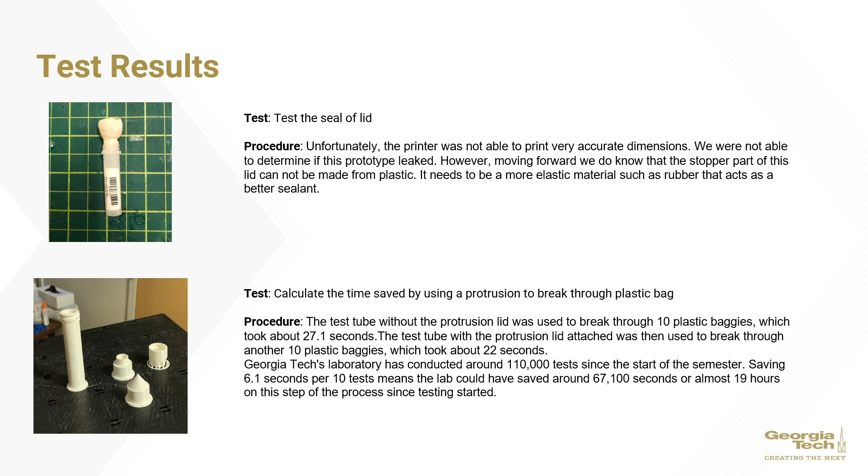The third prototype is a drill-like device that can screw and unscrew test tube lids. It was found that this prototype can save the lab 3 minutes on each rack of 48 test tubes. Our final prototype is the ring loader. By using magnets, the ring loader can lower the time to load the mechanical disruption machine from 90 seconds to 2 seconds. This reduces the time by 97%. Because of these test results, we decided to pursue the ring loader as our final design concept.

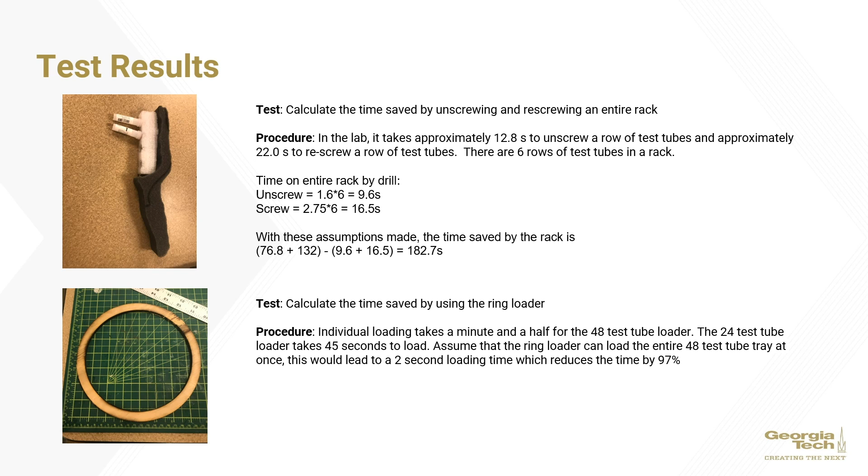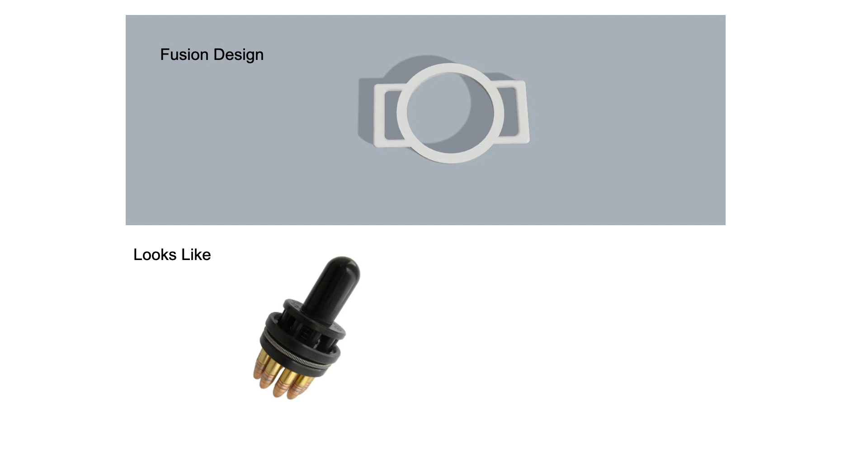This is our Fusion model of our prototype, showing a ring loader that can gather 48 test tubes in the correct orientation to be loaded into the mechanical disruption machine. Our looks-like prototype is a speed loader. This is a handle component attached to a loading component that can gather and keep multiple bullets in the correct orientation. Our works-like prototype is this crane with an electromagnet that can attract, pick up, and hold large objects, such as cars. In our case, we would be using magnets to pick up test tubes.

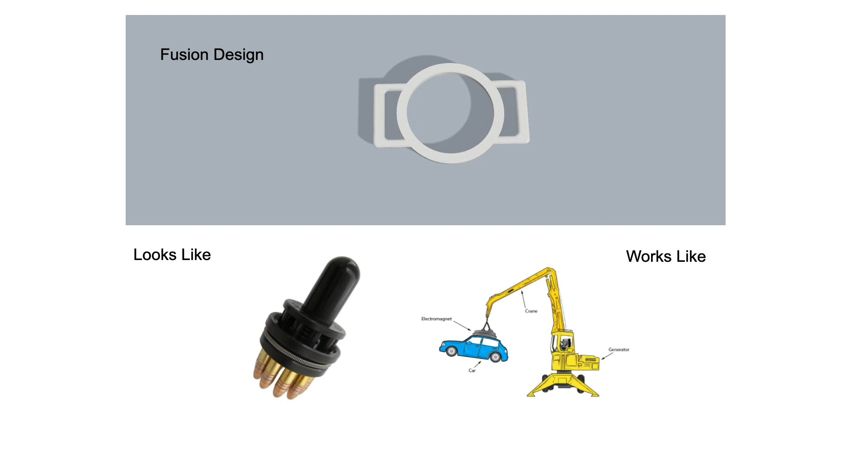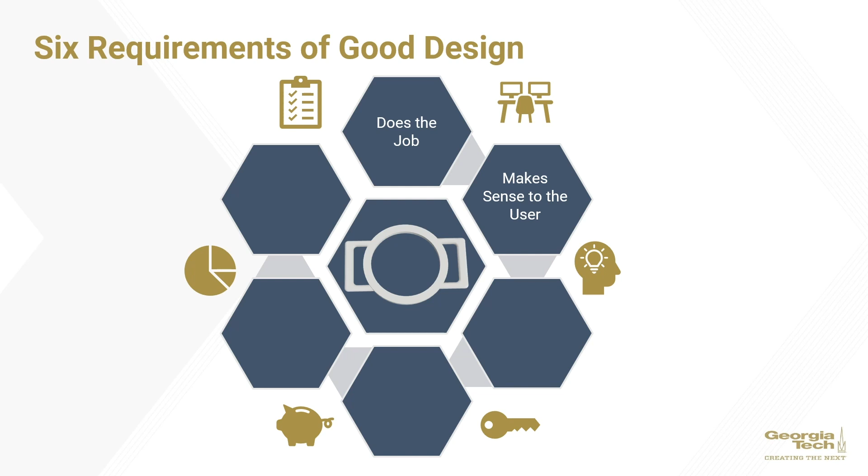6 requirements of good design. First, it does the job. It is able to reduce the amount of time needed to load the mechanical disruption machine. It does this by a factor of 48 by loading 48 test tubes at once rather than one. Next, it does make sense to the user. Due to the handle on both sides, it is intuitive for how to grip the magnet loader. Additionally, there are nests for each of the individual 48 test tubes, which makes sense to how the test tubes are connected to the ring loader.

Next, the user can access it and the user can afford it. Because it is made out of simple materials, such as cheap magnets from Amazon and plywood, it is very accessible as well as affordable. Next, there's a system of proportions. Due to the symmetry of the handles and the equally spaced magnets on the ring loader, there is a system of proportions in this design. And lastly, it has an acceptable appearance. Because it demonstrates the 5 other requirements of good design, along with the symmetry and equal spacing, there is an acceptable appearance.

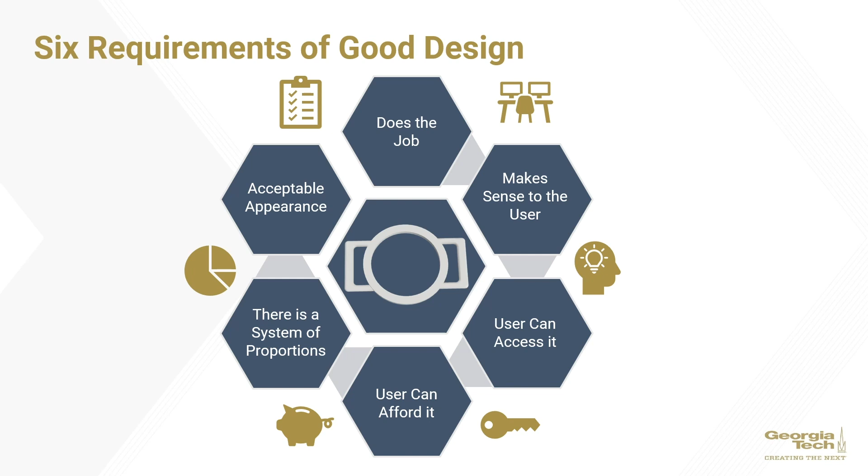When our team entered the concept development phase, we explored a breadth of possible solutions while keeping user feedback in mind. All solutions were focused on making a more efficient, cheap, and durable testing component for the asymptomatic surveillance testing lab. While ideating, we focused on bottlenecks in the process that were specifically identified by the user. These bottlenecks include punching tubes out of the bags, unscrewing and rescrewing test tubes, and loading the mechanical disruptor. These problems are a few examples of the concept problems we focused on while ideating.

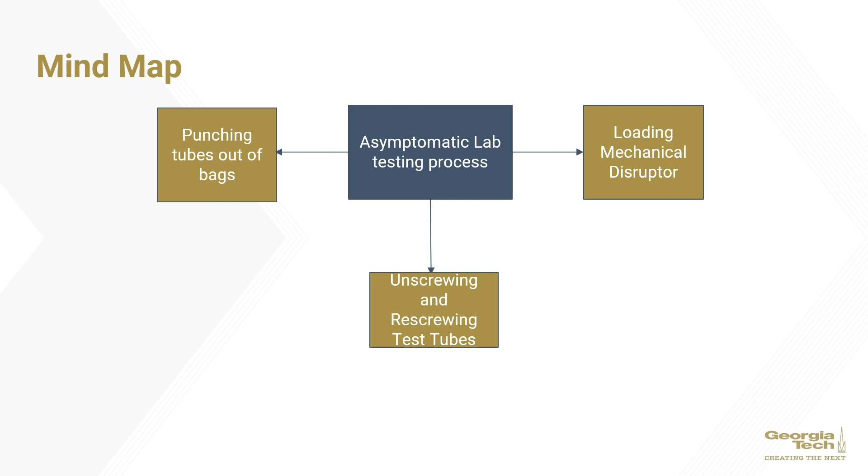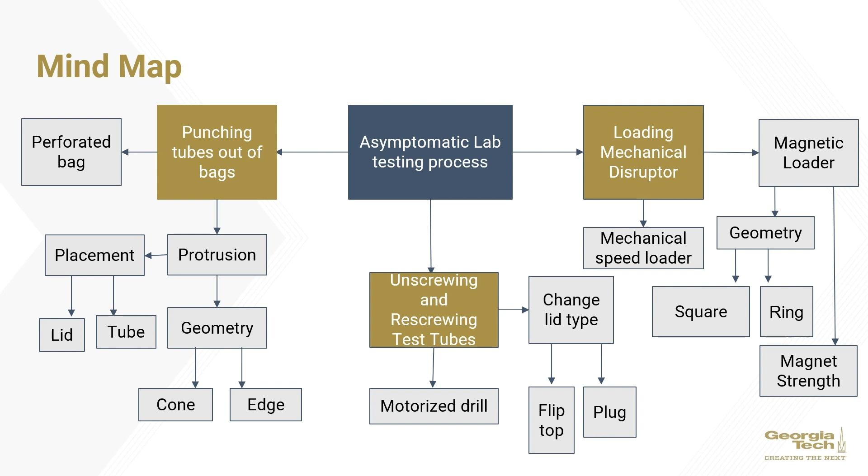From there, we were able to create concepts of many ideas to improve these processes. We looked into adding protrusions on the tubes, creating a motorized drill, and even a preliminary ring loader design. Individually, we came up with potential concepts that address each concept problem. This phase helped us brainstorm many possible design avenues. With feedback from our peers, teaching staff, and users, we were able to narrow down our concepts.

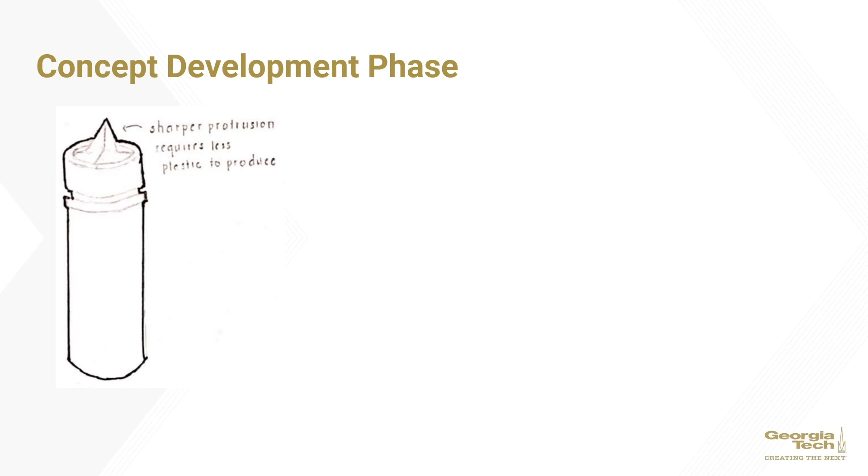Here on the screen is a concept drawing of a tube protrusion to speed up the process of punching tubes out of the bags. This is a preliminary drawing of the test tube unscrewing drill, which would speed up the process of unscrewing and rescrewing the test tubes. And lastly is a preliminary drawing of our magnetic ring loader.

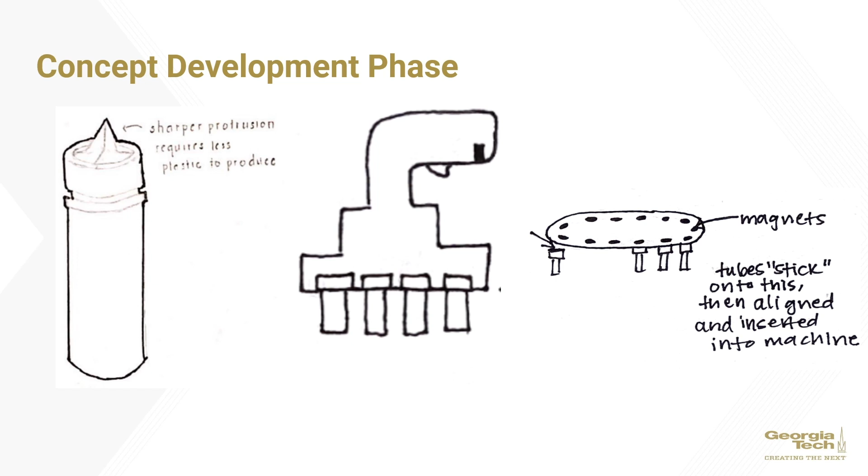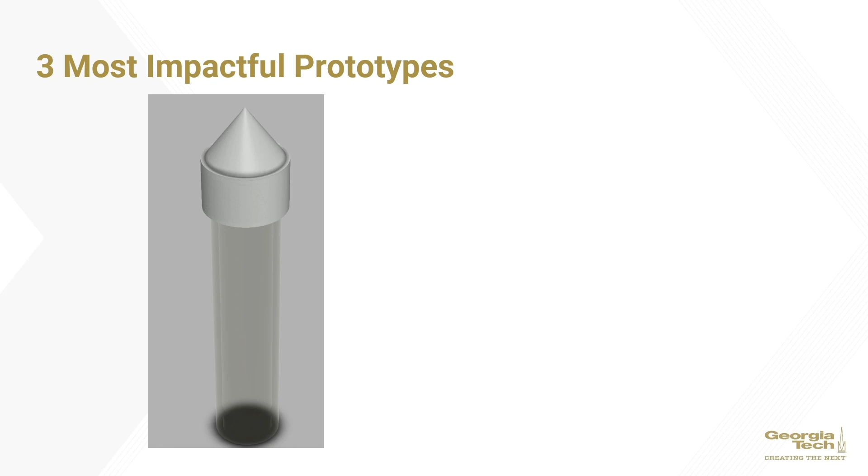After deciding which concepts to move forward with, we started to physically prototype each concept. This was useful to gauge user feedback and test whether our idea would actually solve the problem. This is a prototype of our test tube protrusion, which we 3D printed. This is a looks-like prototype of our motorized drill, and this is a preliminary prototype of our ring loader, which we laser cut. Like Sarah mentioned, each of these prototypes gave us test results which helped us create a new iteration of the prototype. Combining these results with user feedback helped lead us to our final design concept.

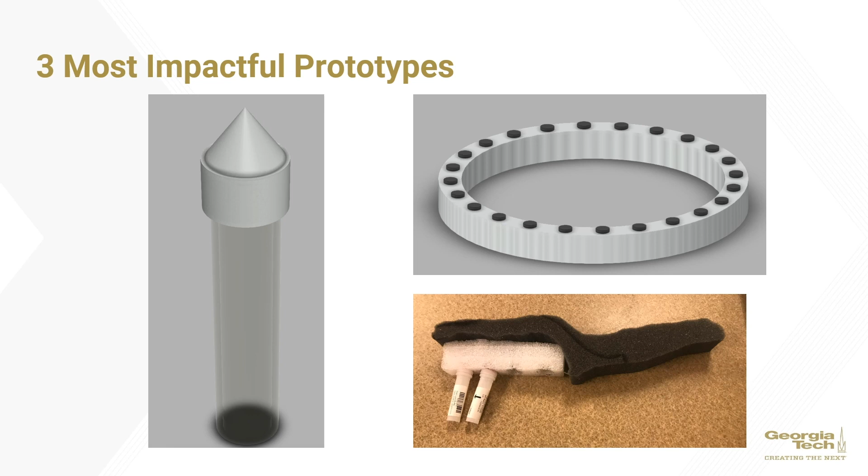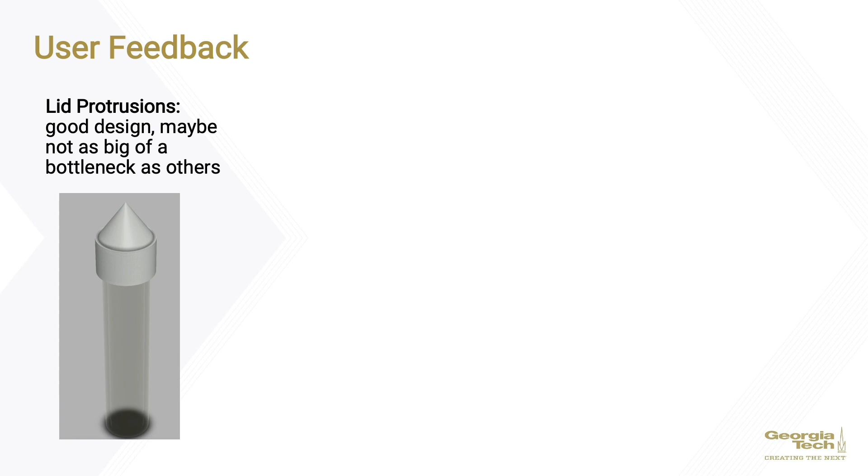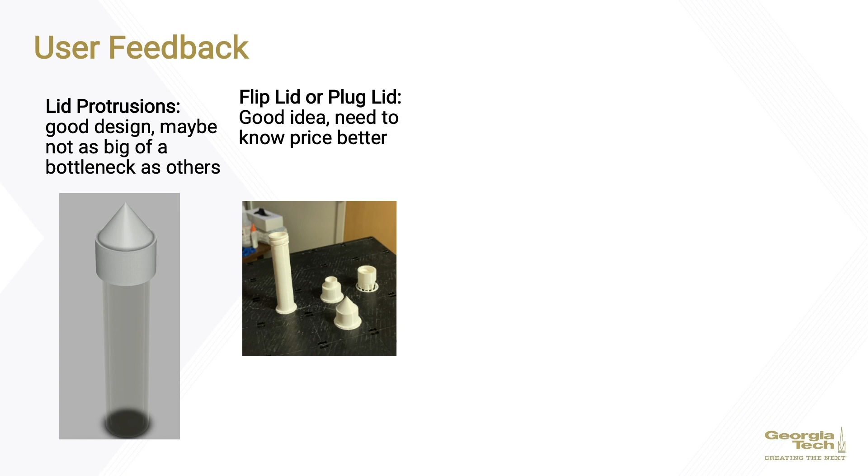This week, we were able to go back to the lab and talk to some of the lab personnel about their thoughts on each of our concepts. First, for the lid protrusions, they said this was a good design, but they already liked the methods that they had in place for ripping the test tube out of the bag, so maybe this wasn't as needed as some of the other things. For the flip lid or the plug lid, they like this idea, but for them, it would be more of a price point rather than a time issue. And so they would want to get to know the price and materials better to make sure it would still uphold that seal and be cheap.

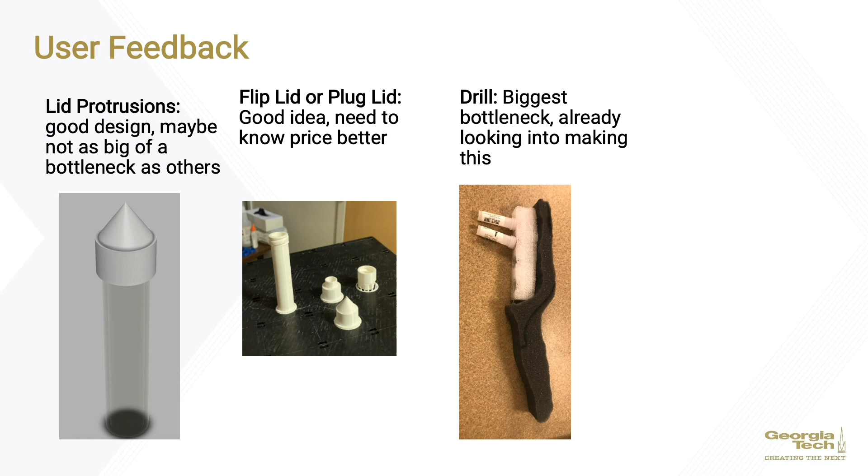For the drill, this was their biggest bottleneck in terms of screwing and unscrewing the caps, and they were actually already looking into making something like this. For the ring loader, they said this was another really big bottleneck for them, and it actually doesn't even need to be fully functioning to cut time for them, as long as all the test tubes could be properly oriented and standing up and ready to be placed in. That's all they really need. And they've also now switched from 24 test tube rings to 48 test tube rings. So we would have to design for that going forward.